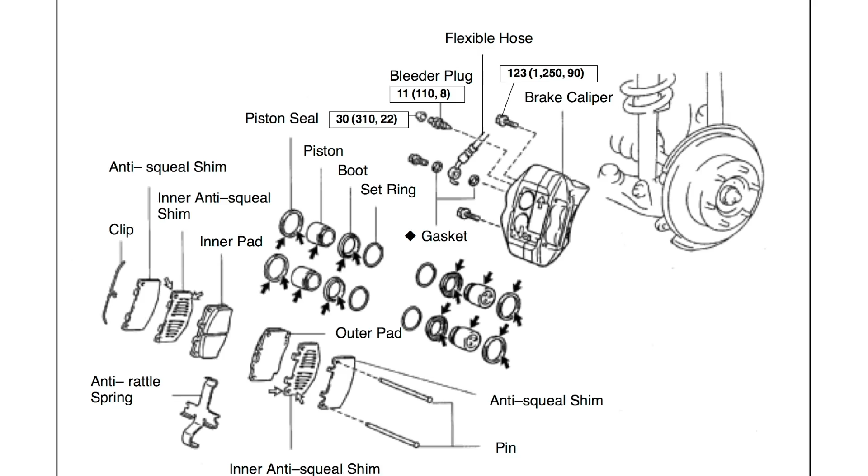So today we're overhauling a pair of knuckles from a late 90s Tacoma equipped with manual locking hubs. This allows you to disconnect the CV axle from the hub, and these came on some of the base model Tacomas that did not have the ADD automatic differential disconnect system. So we have these knuckles, and our goal today is to take the hubs out, take the bearings apart, press in new bearings, put in new seals, and put it all together so it'll be ready to install on a truck.

So we have to start by taking the hubs off, and I have these bolts loosened already, but there's 6 bolts on the dial face. They're very small. They're a 10 millimeter socket. Okay. 6 millimeter shank. And all the old 4Runners, they have that 7. That goes on the hubs only. Oh. Yeah. All right, good to know. Yep. Dial face comes off. You can see this is the mechanism that slides in and connects the inner hub gear to the hub body, and the CV shaft actually slips through here and connects into this inner hub gear.

All right. So take off these acorn nuts from a first gen, I decided to use them because they look kind of cool. Oh, that's where those came from. Yeah, otherwise they're just regular nuts. And then they have a washer. A washer. And a cone washer. The cone washer helps center it and makes it a stronger bond. But the whole thing should slide off. Okay. We got all our fasteners, and there we go.

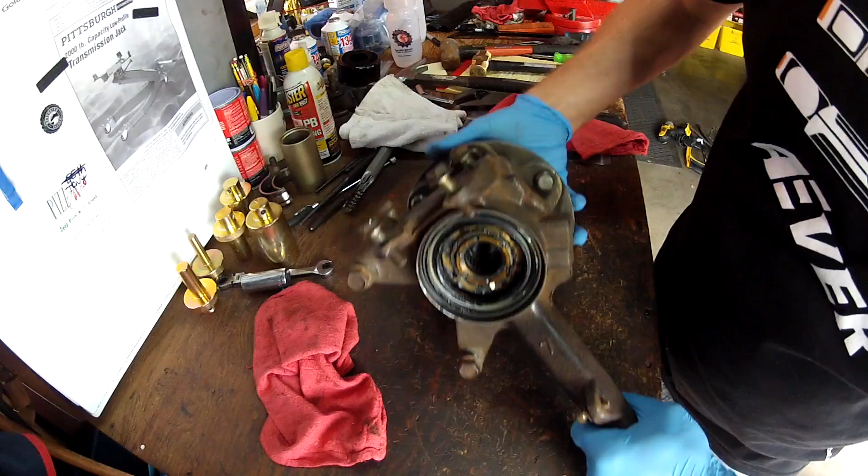All right. So you can see in here, I'm just going to spin it so you can see. There we go. So that's the hub. The hub is held onto the bearing, and it preloads the bearing with this nut. The first thing we need to do is remove this seal. This is the seal that interfaces with the CV axle, and then we're going to take the nut off.

So to start with the seal, we're going to use your puller. We're going to pull out the seal right here, and we're using this slide hammer puller. In order to get both arms in, we were able to get one arm into this bracket first, and then we had to keep this one loose and hook it in there because we couldn't hook them in both at the same time.

Got one arm in, hooked it in, then bolted it into this puller. If you don't have this type of puller, just use whatever you got. Now with a buddy holding it, I'm going to slide hammer it up and pull this seal out. Jordan's going to hold the knuckle right here, and I'm going to slide hammer this and pull it up. Watch the seal come out right here. Okay, 1, 2, 3, right there. Seal is out. Still trying to figure out why the guy packed so much grease in there.

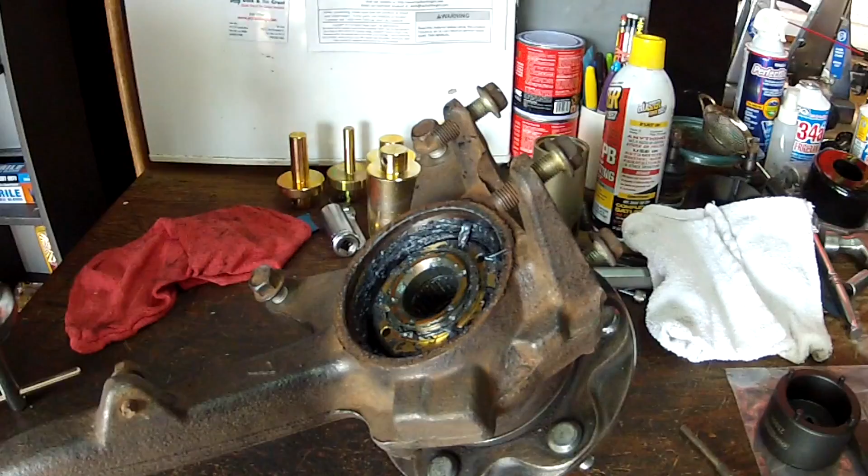If you're wondering about the comment I just made, we're wondering why the previous person packed this with so much grease, because really the grease isn't doing anything. It's running on a bearing. So what this guy packed it full of grease for, we have no clue. There needs to be some grease on the inside here, on the side where the shaft goes. But here, I mean, this is like he was packing it like there were ball bearings there. I don't know.

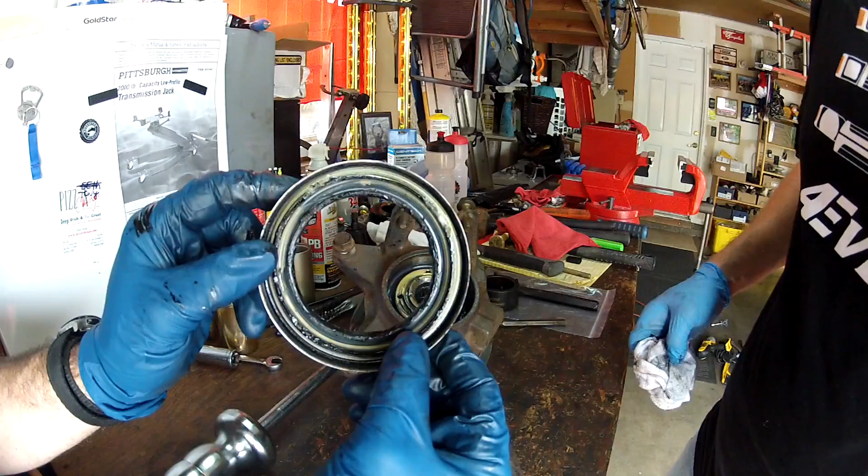So this outer seal went in like this, and we just pulled it out with the puller. You could use whatever puller floats your boat, but these slide hammer pullers work pretty nice.

The next step is we need to remove this ring nut. This screws onto the back of the hub and holds it into the bearing. We have this special spanner tool that fits in. Since it's about 200 foot-pounds of torque, we're actually going to bolt the knuckle into a spare tire and then do what we need to do.

This set nut, you basically set it into this indentation so it won't back off. We noticed that trying to pry that thing back out, we'd just mangle it a little bit. So when this thing spins up, it's really not going to get in the way of much. We found we could remove it without having to bend that out at this time. What we do before we reassemble it is take a punch and bend that out, get rid of that nub when we insert it. But to take it off, it's not a big deal, so we just leave it and take it off as is.

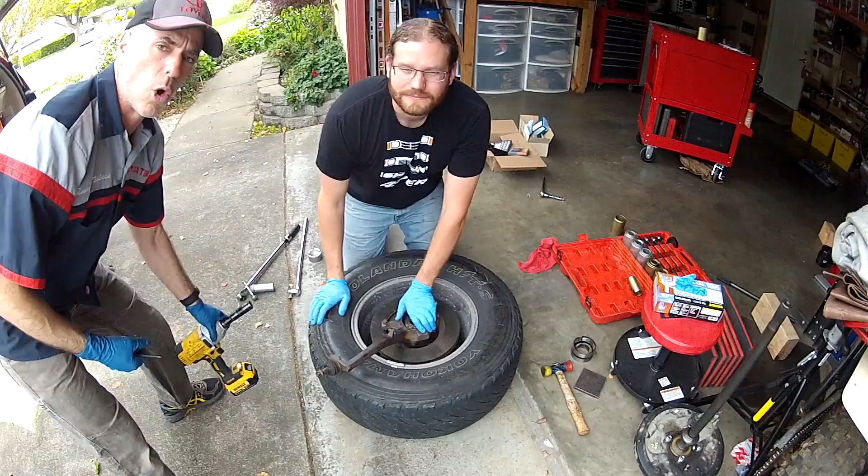So this is what we got going on: a spare tire, an old rotor, and the knuckle we're working on. What we're going to do is put a couple lug nuts and cinch this whole assembly with the rotor and the knuckle onto the wheel, and the wheel is then going to give us the ability to hold it firm while we break this loose, because it's held at 205 foot-pounds. So we need a lot of leverage to hold this in place. Right now Jordan is holding the assembly, he's going to tilt it up, and I'm going to get a couple lug nuts started.

Two seems to be enough. Just do them opposing, and then cinch it up with your gun or your lug nut wrench.

Okay, so here's the tool for taking off this set nut. It's a little bit of a friction fit, so we're going to tap it into place, tap it flush. Good. Take our breaker bar. Now I'm going to hold the wheel firm while he gives it some force.

What I was doing with my hand is holding it, because the tool has actually walked up on them already. This thing with the 4 pins wants to try to rock out of the holes, so I was holding pressure so it would be less likely to do that. See how it rocked out? So putting a little downward pressure - this is even more important when you're tightening it up at the end of the job. You want to push downward pressure so it doesn't walk out on you.

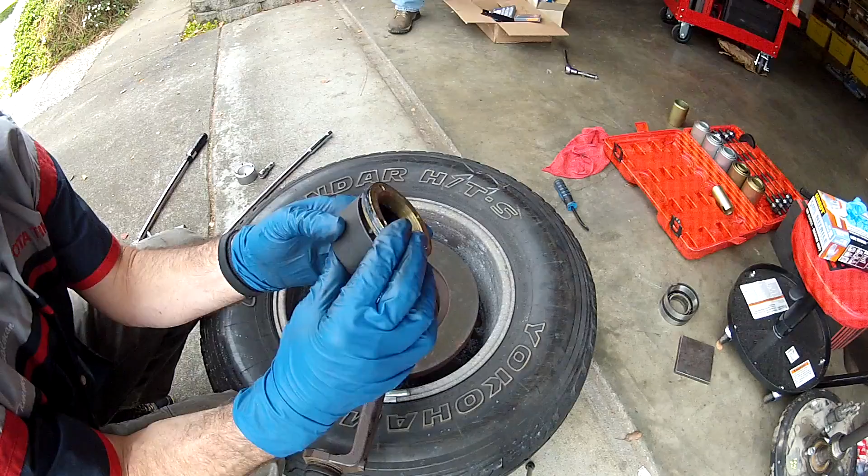Underneath the nut, there's a washer, and he's just going to use a magnet to pick it up. It's stuck in the grease. Okay, and that's the washer - big thick spacer or washer, whatever you want to call it.

We're just going to take the knuckle back off of the spare tire.

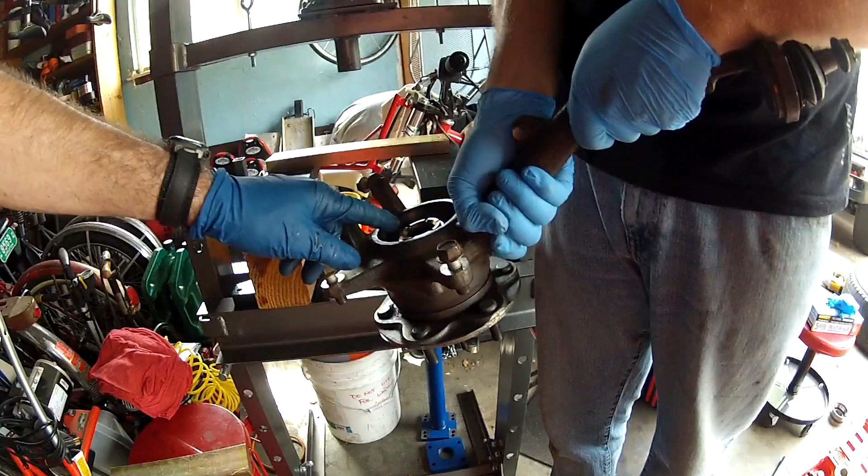We're going to drive this hub out from the knuckle here. What we need to do is gain some height to give room for this knuckle to go down.

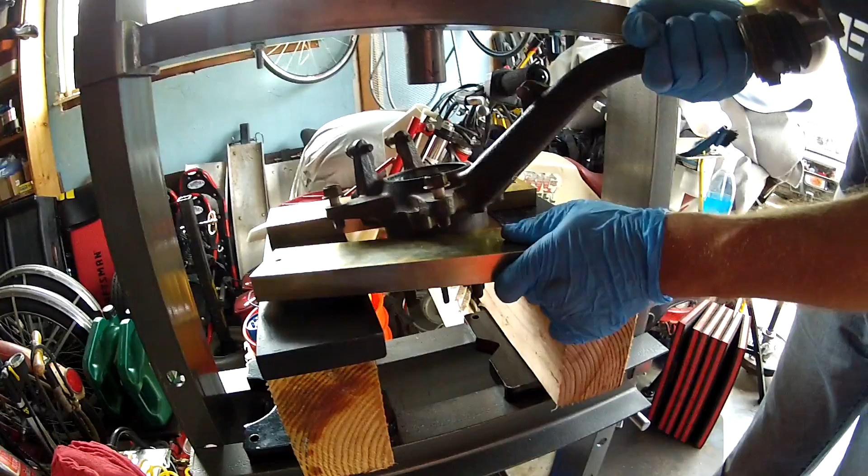What we came up with is the Harbor Freight press plates, plus a regular 4x6 section of wood cut into two 12-inch sections from Home Depot, about 15 bucks. That's sandwiched together. I also bought a couple more plates from a local fab shop, 1 inch thick by 4 inches by 12 inches long, to help disperse the load. Then we're capturing the hub with two other press plates that take the whole load, getting right underneath the nubs of the knuckle.

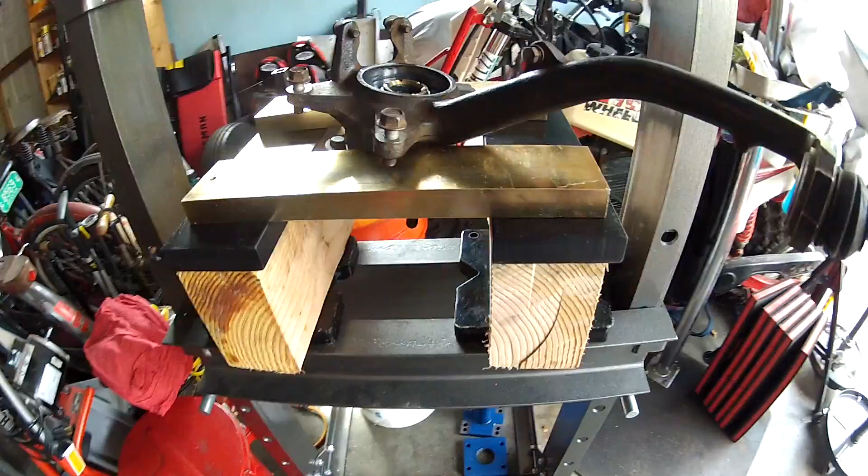On the back side, same thing, we're capturing a meaty part of the knuckle - this is the boss where the backing plate bolts on. So that's our setup: wood sandwiched between two plates, a Harbor Freight plate, one from the fab shop (4 inches wide, 12 inches long, 1 inch thick), and another bar that's 1 inch thick - I can't remember the width, but it doesn't matter, it works.

There's a brass bushing here, and the driver we're using is trying to sit on the steel part and not the brass. This piece goes around it perfectly, so that's what we're going to drive with.

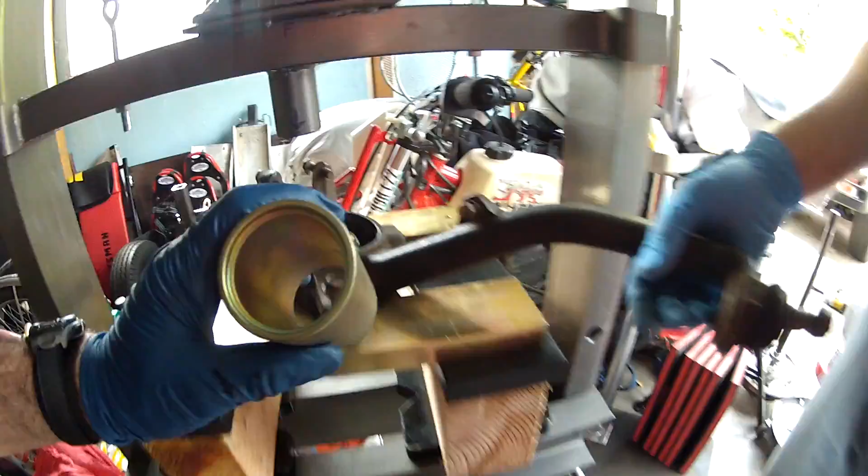If you don't have a press sleeve kit, you might find some type of pipe, like a piece of gas pipe, that would work. We have this press sleeve kit with all different size sleeves - it's a little pricey, I got it on eBay for 130 bucks, but it's nice because it has a ton of sizes for a lot of applications.

We found one that fits the outer diameter - it goes right over the brass but doesn't hit it. It hits the next part of the sleeve right there.

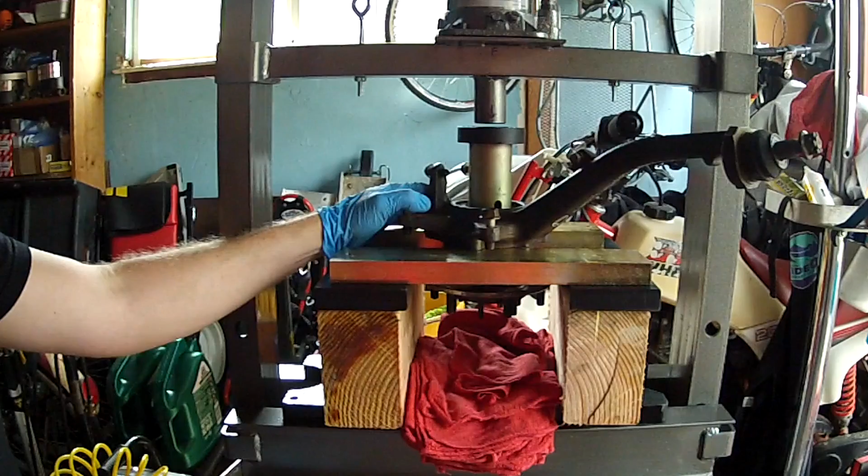This is just a regular Harbor Freight press that you can get for, depending on sales, anywhere from 170 bucks to a couple hundred. Works pretty good, it's a 20-ton press.

Our goal here is to press the hub out of the bearing and leave the bearing in the spindle, so let's see what happens. What we noticed the first time is the bearing came apart in pieces - this might happen to you too, and we'll show you on the other one. If this one works the way we hope, we'll also show you the disaster of the other one and how we got it out the rest of the way.

I'm applying pressure. It's coming, okay it gave. This is what happened on the first one - it gave a little, then got harder. Maybe this one's going better, we'll see, I hope so.

It's going pretty smooth, Jordan. Don't jinx it. You jinxed it, Tim.

It's loading up again. I think the bearing's coming with it. No, keep going. Maybe we got lucky on this one. We did. Okay, there. There it is, it's out. And there is our hub - the hub came out clean.

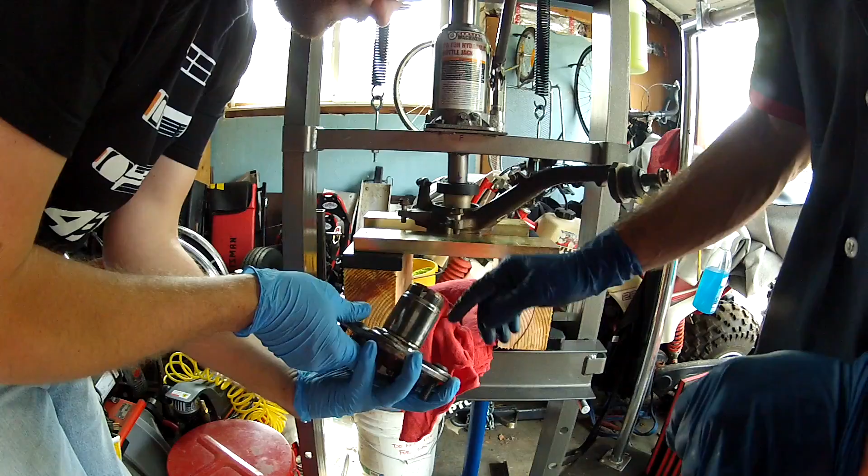On the last one we had to cut off part of the bearing, so this one being clean is awesome. We'll show you how we fixed that other one that got stuck.

The next thing we need to do is pull off this oil seal. This is a kind of dust seal between the knuckle and the hub when it's in place, and there's a circlip underneath that we'll take off next. So this is the seal right here, this outer thing.

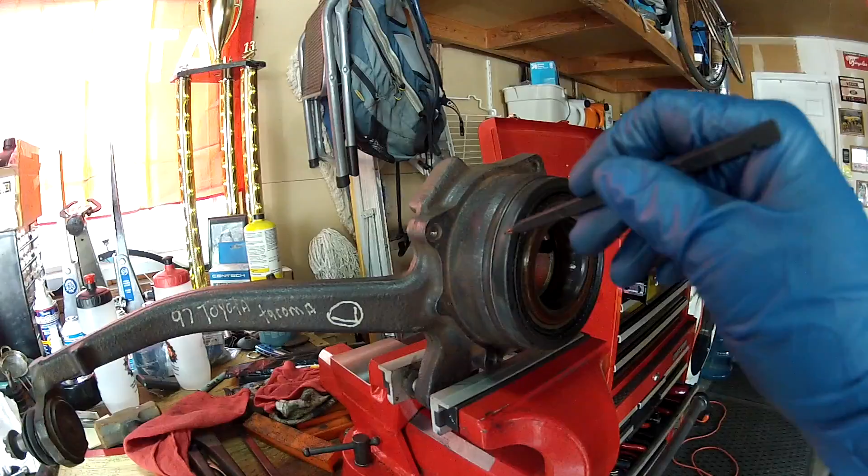We're going to get a 3-jaw puller and slide hammer it off. Here's the setup - we've got the 3 jaws grabbing right behind the edge of it, and there's another one over here. Then he's just going to slide hammer it off. Okay, go for it, Jordan. There it is, it's off - easy as pie.

What we noticed is the bearing came out a little bit and was pushing pressure on this C-clip. So we took a hammer and pounded this thing back away from the clip. Now Jordan's technique is grabbing on those lips and pushing it back in - he'll get it.

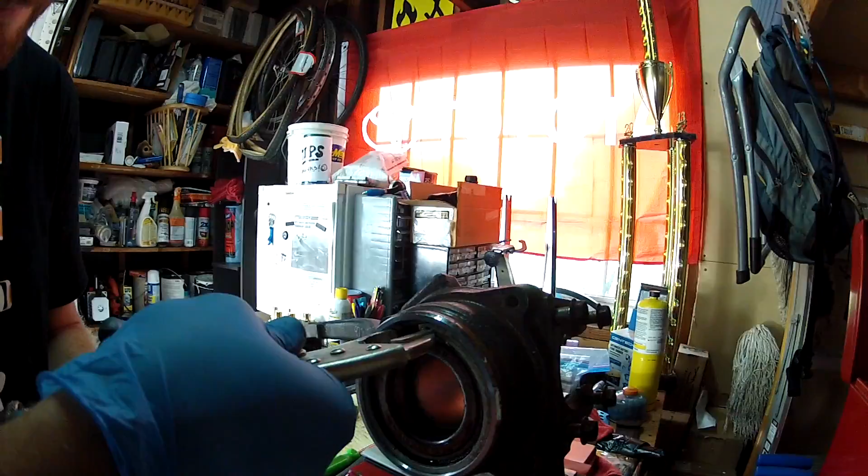We got it out a little bit. Now if we have a small screwdriver, we can pry it. Got it out a little bit. He's going to just try to pry it out now. There we go, he's prying around the edge with the screwdriver.

Yeah, you can work it out right there now, just with your hands probably. The bearing's probably still up against it just a little bit.

So yeah, the bearing was loading up that clip and we weren't able to get it out. But we're actually going to replace this clip. Yeah, you don't reuse it. Good to assume, like this one, you probably could, but we just assume that it's going to get kind of deformed.

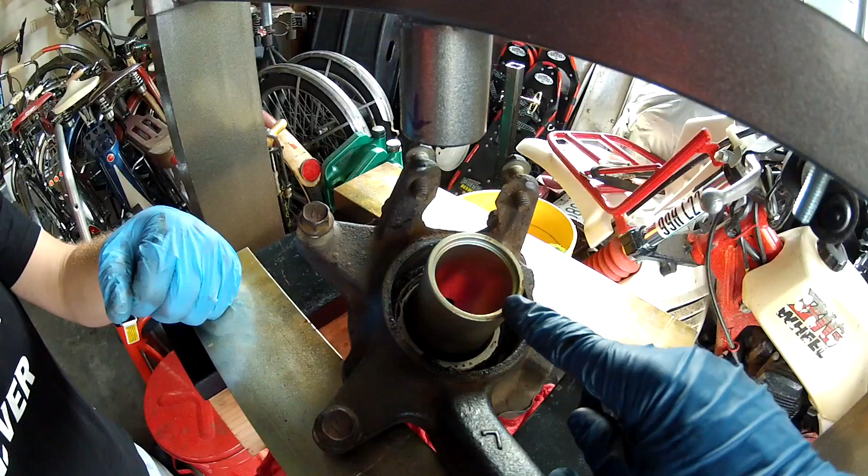So that press sleeve that got stuck in, it's still stuck in, but we're going to work around it. We're going to put a press sleeve of greater diameter over the outside, and then just press right over the top of it and it'll work. And then we'll get that sleeve out later once we got the bearing free.

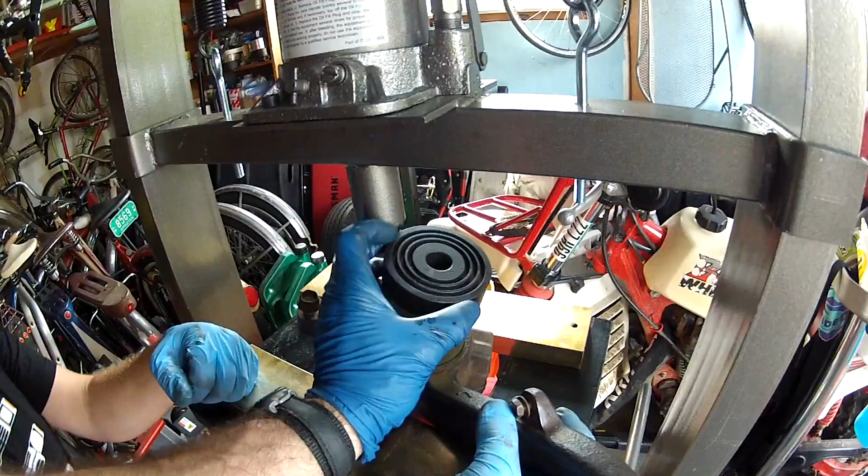This is the bigger sleeve that we're putting over the top here. It fits the diameter of the bearing pretty good. Now Jordan's going to rock it in place here, and I'm going to put this over the top. There you go, and that's our setup.

Just like how we pressed the hub out, now we're going to get the bearing out the same way by using the same setup with the press plates, the 4x6, and then the press sleeve to drive it out. All right, so here's the pressing happening here again.

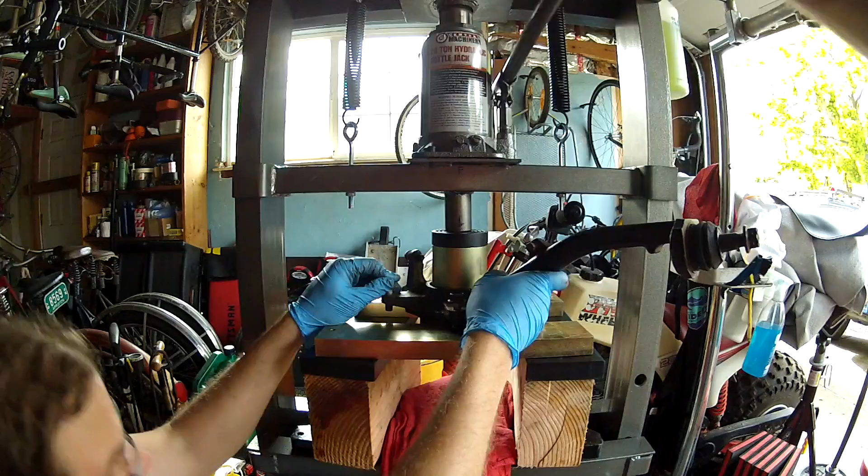Is it lined up good? Yep, keep going. Okay. That's going up pretty easy. Should be dropping out any time, I think, huh? There it is.

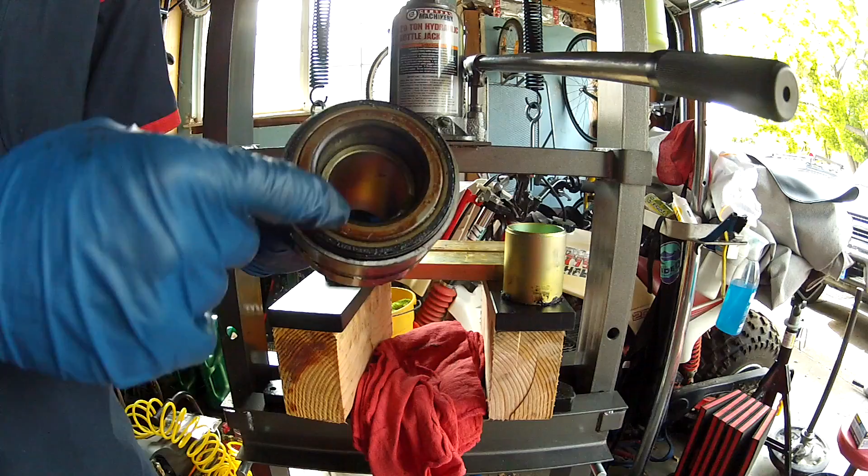Okay, so this is the bearing with one of my press sleeves stuck in it. We got to get this sucker out, but I think we're just going to drive it out with another press sleeve that's a little bit smaller than this inner diameter, and it'll hit the lip of the press sleeve and we'll drive it out. So I want my press sleeve back out of this bearing.

So I just got it captured again by a couple bars. Press sleeve that's a little bit smaller than that inner diameter, and I'm going to press the sleeve out the other side.

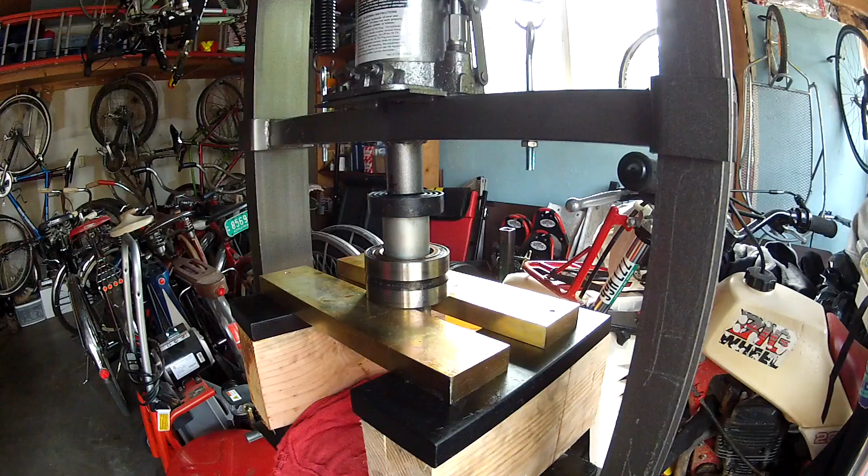There we go. Now I got my press sleeve back. You can see it wiped off the gold anodizing or whatever, so it's kind of changed it a little bit. But you can see how far it was driven in. And then now that is the actual bearing. It's a big burly bearing for these front wheel hubs.

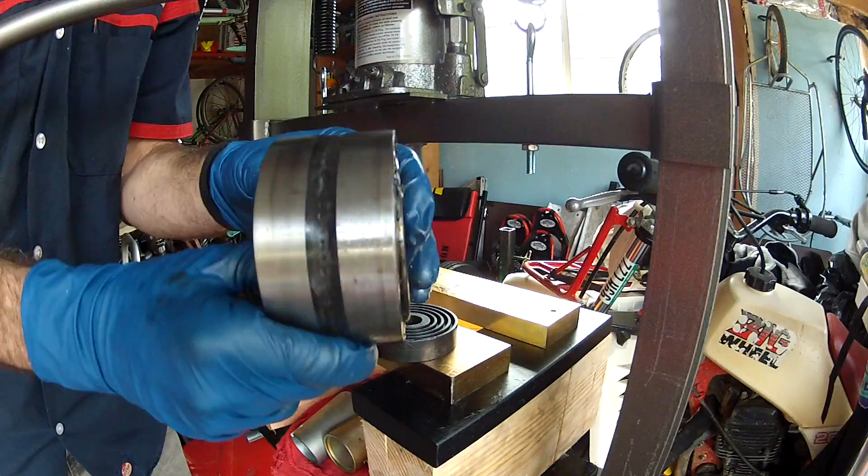Okay, so we have cleaned out the inside of the knuckle, and now here is the new bearing. It's a Koyo brand bearing. I didn't buy this from Toyota, I just bought it actually on Amazon, and it is actually the factory part. Now what we have read and seen is that you put the black side, the side with the rubber seal, down in, so that the metal shielded side is up where the circlip goes. So basically we're going to do this and press it in.

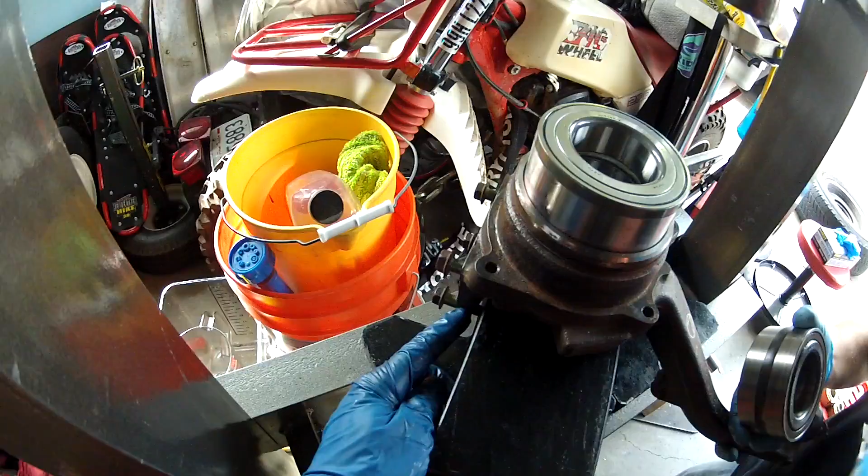So here's our setup to now press in the bearing. We have the Harbor Freight press plates as a base. Then we've got the 2 press plates and then 2 more on top of that just to give distance for the knuckle to hang off this backside. And we'll show you when we get the knuckle in place. So you can see the reason for the stacking of plates, it was to give space for that to hang off the backside. And so he's centering it underneath the press.

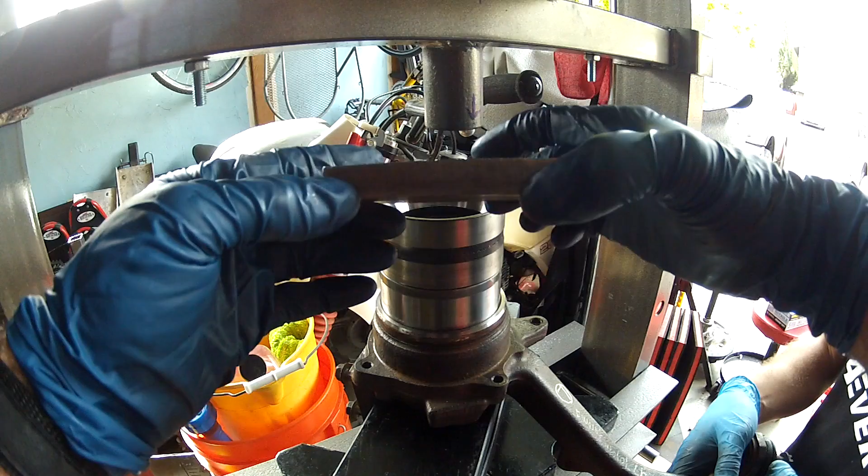Now what he's doing, we got this one, see the damage to this one? This was the first part of the bearing that we pressed out and it broke apart in pieces. So we noticed that using this as our pressing device, it matches up perfectly, right? So I just got this 4-inch plate that I bought online. You could actually buy pieces of plate online, 1/2 inch thick, to give a nice flat surface to press against.

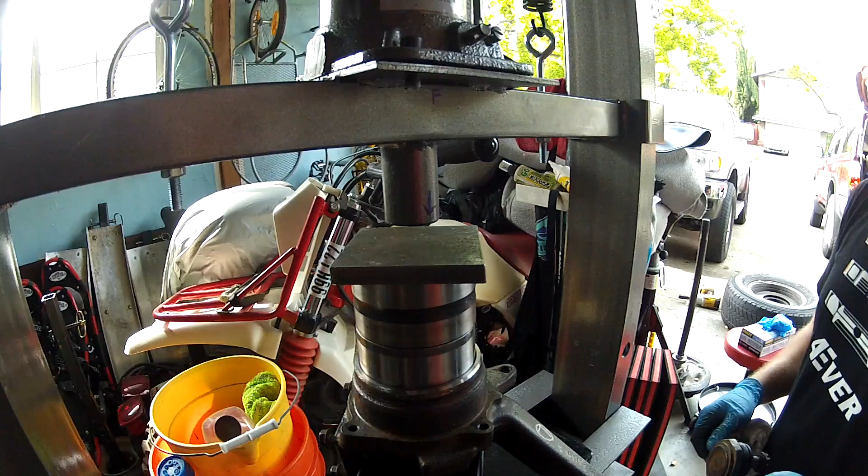And now we're going to center this thing underneath there and press away and press the bearing in. What I'm doing here is you could gain a little distance by screwing this out first so you don't have to press as far. It gains you more length from your 20-ton press. Okay, so now you can see we're closer to the material right off the bat. Now we're going to start pressing. What you might find is you might run out of room. You have to press so far, you have to reset. So we're trying not to have to reset.

Okay, now I'm bringing the press down. Okay, we got contact. Bearing's going to start going in. Bearing's driving in. Whoa! See, it did that last time. It hits like a lip. I think what happens is it goes in slightly sideways and then it corrects when it gets about halfway. That's more like it, yeah. If that's not going in totally square, then it just squares itself.

There's a relief down to below where the circlip clips. So you can take this bearing and press it all the way until this bearing stops without worrying about your driver bearing getting stuck. So like Jordan said, you can use this old bearing to press the new bearing all the way in, and you don't have to worry about this bearing getting stuck in the knuckle. We just did it on the other side, so you'll see it for yourself. So when you meet significant resistance, you know that you're done pressing, then you back off.

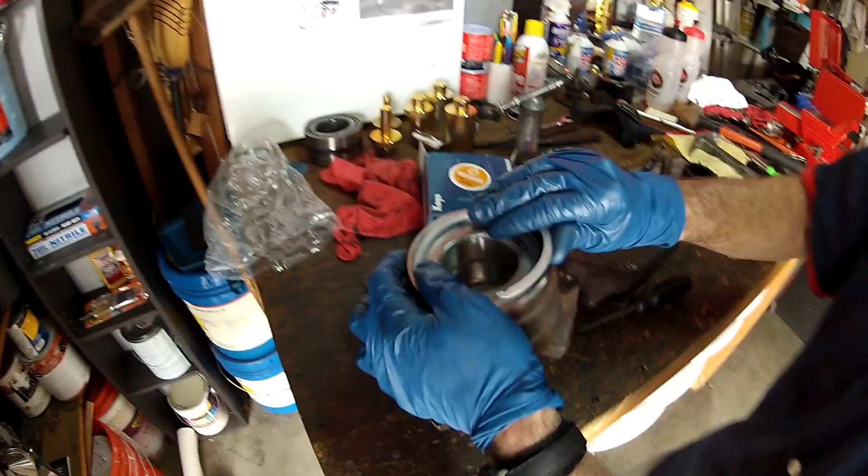Okay, we've installed the bearing, and you can see the circlip groove in there, so now what we're going to do is install the circlip. I think Tim has a special method, right? So you just work it in with your hand. Work it. You got to get it started on one edge, and then lever it in. There we go. Great. It's in. Okay, so now we need to put the seal on here and install the backing plate.

So Jordan's just putting a little bit of grease on the outer diameter of where the seal is going to be sealing up on this, so it just slides over. He's going to square it up with his hands as best as possible, and then he's going to use a brass drift with a hammer to knock it in place. Try to get it on as square as you can. Yeah. Now I could see right now that this side is high, so whatever side is high, there you go. Now it's going in level. See how he's working his way around, looking for whichever side's high, and hitting that. That looks like a good hit right there.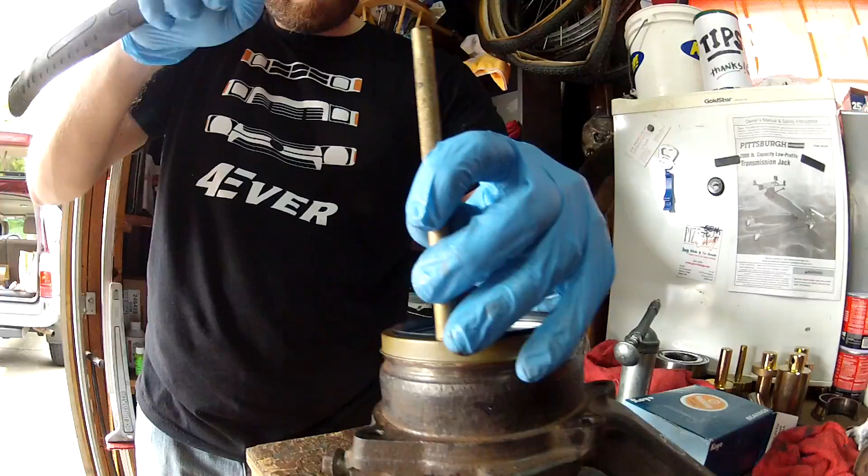And this seal is not so critical. It's really just a dust seal. So if we're a little bit mean to it, it's not the end of the world. You just want to sink it in all the way. Yeah. Okay. And now we're going to apply grease to the inner lip of it. And I'll spread it around with Tim's handy dandy grease squirter. Lubrication, fancy grease squirter. Great.

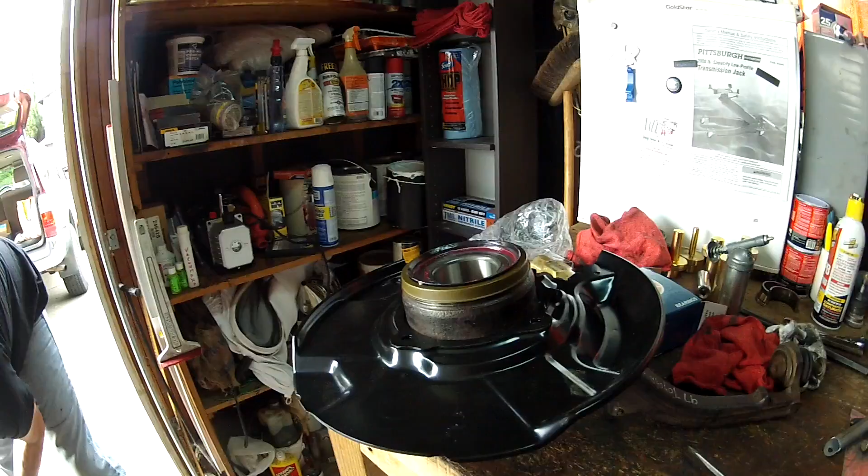Okay. Now he's putting on a new brake dust shield, and these are marked left and right. You'd have a hard time screwing it up. And this dished side faces up to give room for the rotor. So what are those, 10 millimeter nuts, or bolts? 12 millimeter heads. 12 millimeter bolt. Yeah, so these parts are all being replaced in this case because the backing plates and nuts had a little bit of rust damage. You want to be sure that you put this on before you press the hub back in. Yeah. You'd be very unhappy.

Yeah, you'd have to. It's time for a quick intermission to share an important message with you before you watch us press the hub into the bearing. The way we set it up is we put the knuckle directly on top of the press plate. Then we took a press sleeve, like so, with this adapter that comes with the kit I bought. We put this on top of the hub with the wheel lug nut studs facing up, and we drove the hub down into the bearing, and everything worked fine.

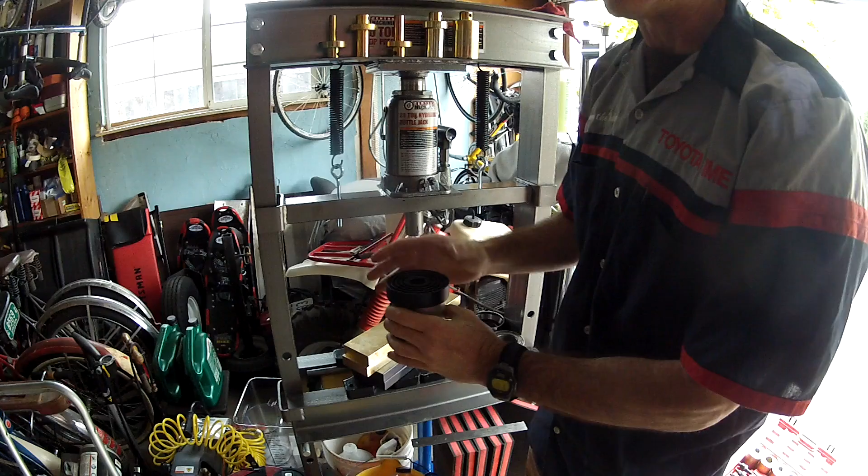After the fact, Jordan realized that we didn't do something correctly, and this is what we did incorrectly, and I wanted to share it with you. We should have been supporting the bearing on the underside while we're driving all this force with the hub into the bearing. So here's one of the bearings that we pulled out.

What I'm talking about is supporting this inner sleeve. So you grab a press sleeve that will fit good with it, or maybe it's some type of piece of pipe. This width is right about 2 3/4 inches. So this press sleeve, I have all these multiple press sleeves. This one fits pretty good.

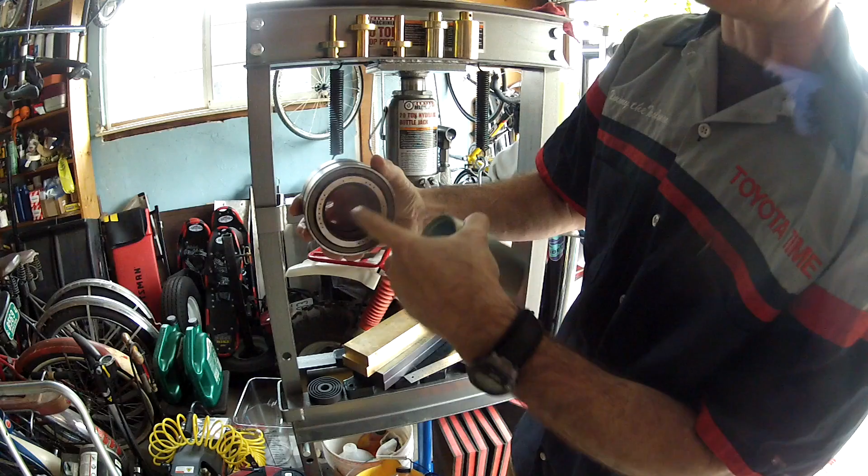You want something that will fit this diameter, but also allow the hub spindle to go through. So it has to be bigger than this inner diameter, but not so big that it goes over the sides and puts pressure on this part of the bearing. So in the next clips where you're watching us do the pressing of the hub into the bearing, just pretend that we had something supporting the bearing on the underside while we're pressing the hub through.

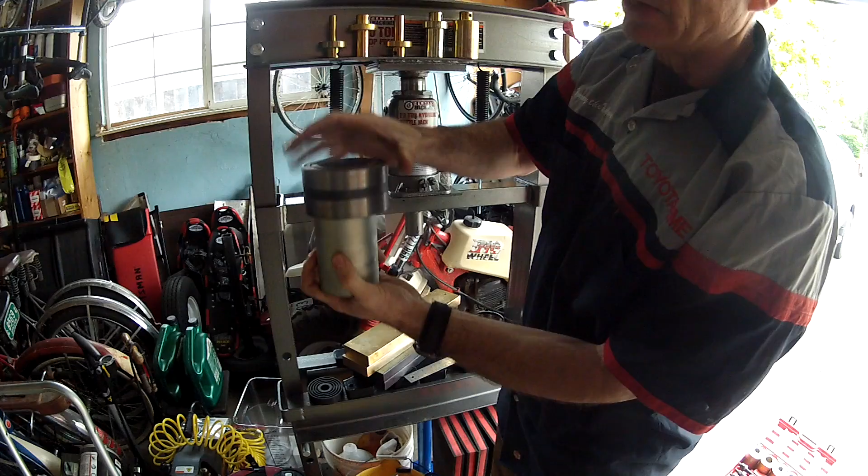So this would be inside the knuckle, and this would be underneath supporting it while we're driving that hub through. The reason why this is important is because the bearing really isn't designed to handle that kind of lateral load going in from the side. Because this bearing has been on that spindle for so long, it gets kind of locked on there.

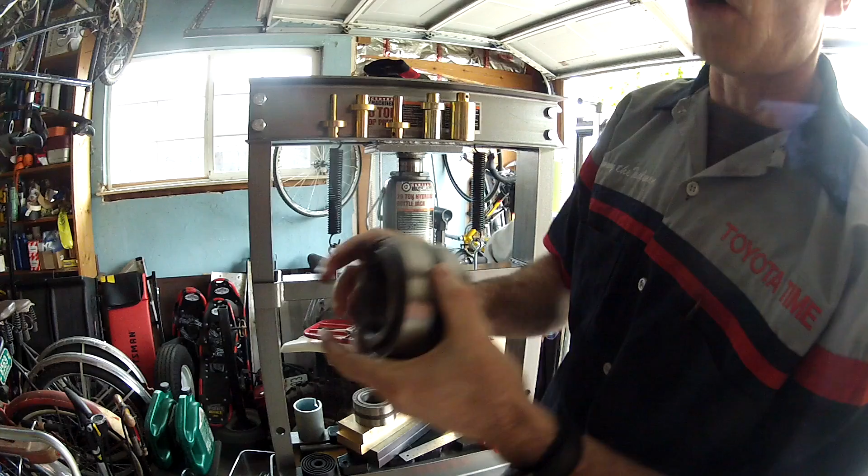And you can see this play right here. This play happened when we pressed out the bearing. So this bearing is now shot. You shouldn't have this play. This was the first bearing that got destroyed when we tried to press it out. Part of the bearing was still stuck on the shaft of the hub, and we had to cut it off. And you could see all this slop here too. We basically, like I said, destroyed the bearing.

So we're trying to avoid destroying the brand new bearing we're putting in, so that's why you want to support it on the back side while you're pressing it in. So far with my experience, I've done rear axle bearings, and then I've done this set of front wheel hub bearings for Jordan. What I've noticed, and it's probably common with most jobs, it takes a hell of a lot more force to press the shaft out of the bearing than it does when you're pressing it back in, because nothing's really locked on it when it's brand new.

But when it's been on there for a long time, it gets locked on there. It takes an incredible amount of force to break it free. And then once it starts breaking free, then it goes smooth. You're going to watch us press in the hub, and it goes really smooth. We lubricate the shaft, and it goes in fairly smooth. Did we screw up by not supporting the bearing on the underside?

And yes, we did. And so I wanted to drive that home, that when you do your press work, if you're following this video tutorial, to support the underside of the bearing while you're driving that hub through, so you don't risk damaging this expensive bearing. This OEM bearing is about 65 bucks. So long story short, did Jordan and I get lucky on the press work and that we didn't damage his bearing? I think we did.

There's no detectable play in his bearing. It's smooth. He's driven it a few hundred miles and everything seems fine. Did we potentially lessen the life of that bearing? Maybe. So don't screw up your new bearing by making the mistake that we did. Support it with some type of press sleeve or piece of pipe on the underside while you're driving the hub through. Okay, back to the video.

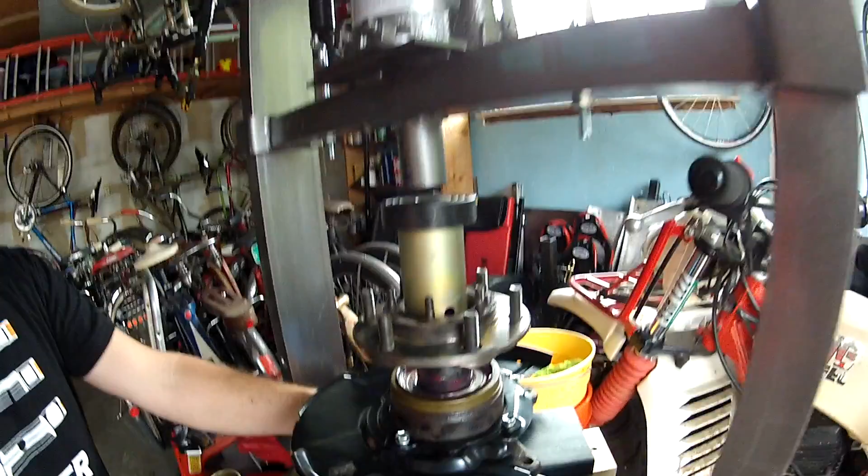Using a press sleeve with the adapter on top, we're going to drive the hub into the bearing and seat it all the way to where it stops, where we get resistance. Yep. Okay, it's firmed up and it's going to start pressing down. And you can see that we actually put some grease in there as well to help it slide in. Lubrication, people. It helps. Great.

Done. That's it. Jordan saw it and I felt the resistance as soon as he said it, so we knew we were done. Get that out of the way. And he's going to pick up the whole knuckle assembly. So now, here we go. We got the hub in.

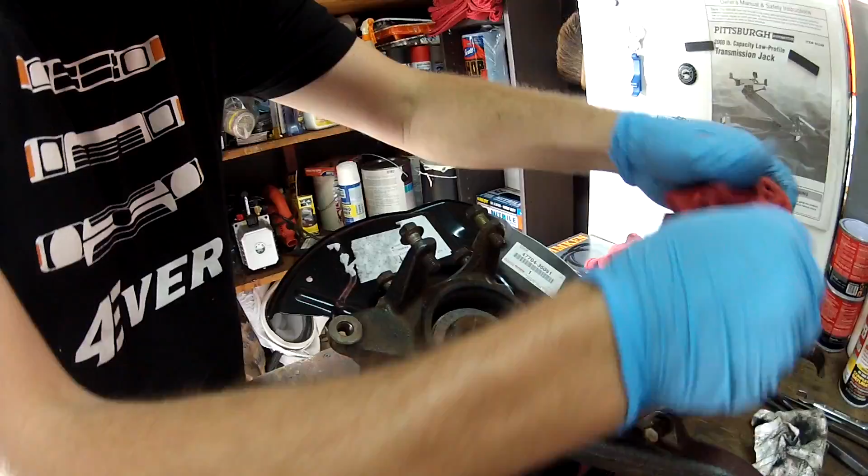Here's the spacer. And so just for good measure, I'm going to just spread a little bit of grease on the spacer. Lubrication, lubrication. Okay, drop that over the top. Oh, and take the ding out of our lock nut. So what he's talking about, that ding that I talked about earlier, it's that little indentation that helps set it and keep it in place. So he's going to take that out with a punch.

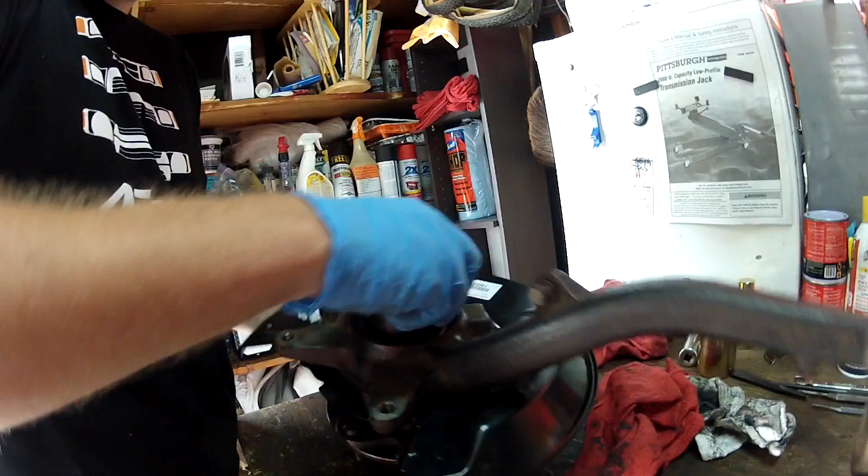Good. Look good? Okay, so he just bent that back to where it looks more like a circle than an indentation. So I'm going to put a little bit of grease on the threads, surface here, so that it has less friction while it's tightening everything up. And this is actually going to be setting the preload of our bearing. So now we'll take our tool. Is that starting to thread on good? Yeah. Okay. He's screwing it in just as tight as he can with his hand. That's pretty much it.

Okay, like before, we're going to use the spare tire and the rotor to hold this thing tight to where we can torque it to 205 foot-pounds. A wheel, indeed. So what we've noticed is that you really have to set this tool into the set ring. Make sure it's really square in there before you start cranking on it. Now again, what I'm going to do for Jordan, I'm going to hold downward pressure because this tool wants to rock out. Not rock out to like Metallica, but to rock out of its purchase.

It's cracking me up. Getting a little hard on the hand. Okay, go. Oh, hold on, so it's rocking out. Downward pressure with two hands because I think it wants to rock up. You ready? Yep. There we go. That was it. That was 205 foot-pounds.

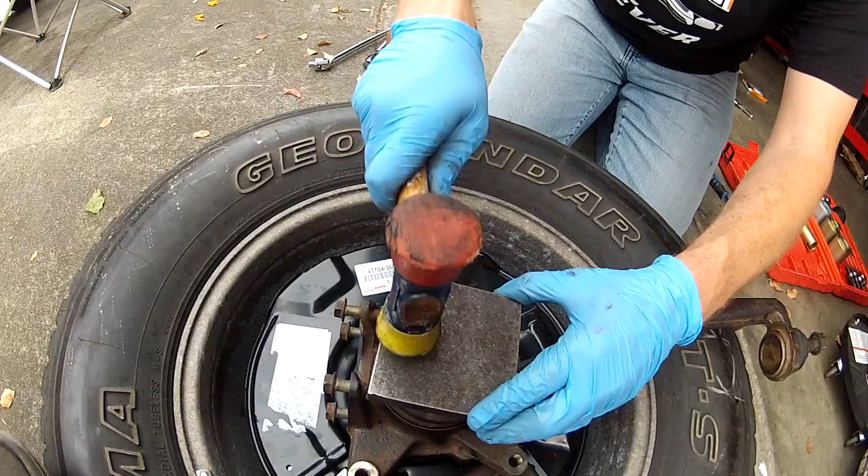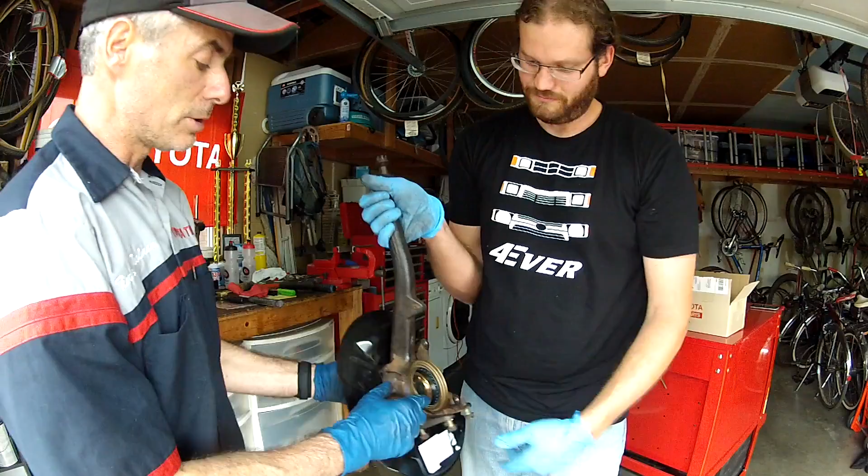Great. It's good. Now it's done. So here's the finished product. Nice and smooth. Ta-da. Nice new brake dust shield. Nice new seals. This is what was stuck on the hub spindle, this part of the bearing.

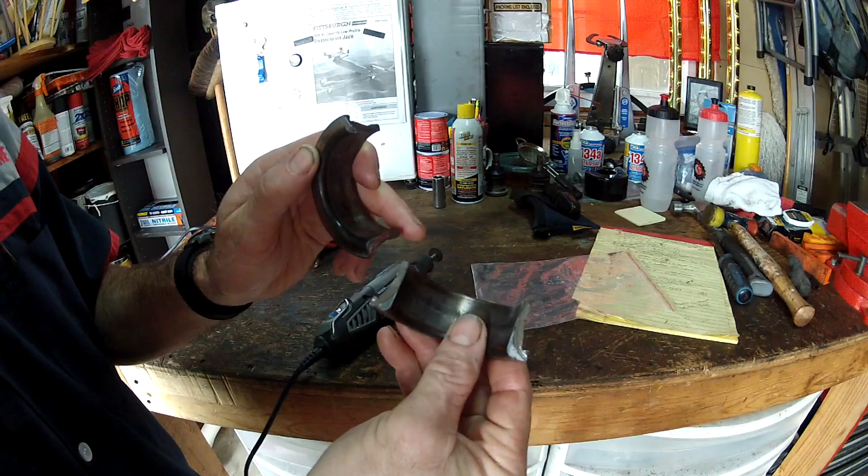So what Jordan did is he took a Dremel with a metal blade and he made cuts on either side. And then when he was pretty sure that he was almost all the way through, we took a big chisel, and we knocked it loose, and after quite a few strikes he was able to split it and it fell off. So he ended up scoring the hub, just barely nicked it. So he did a really good job. He had a really steady hand.

But if you're faced with this, where part of the bearing after you press the hub out is stuck onto the hub spindle, we couldn't get something underneath the lip to pull it off. So we tried a whole bunch of different pullers and nothing could really grab underneath it very well. So our last ditch effort was to cut it and it worked out pretty good. You just got to go slow, pull the blade out of the cut on a regular basis and take a look and just make sure you're not going all the way through. And then when you think you're pretty close, then stop and try to chisel it out.

You could see that the material is much thicker on the bottom. You could see right here. So as you're cutting this out, if you're doing the same thing, just know that you have to cut deeper down here below. So this was the first hub we did that we had to cut this part of the bearing off the spindle.

All right, so we're back on another day to complete this job. Great. Now that we have the new bearing and seals and associated hardware back in this Tacoma knuckle, we have to pull out his old knuckles, his old CV axles, and we have to replace them with this stuff. So these manual hubs require a different CV axle, so you can't reuse the CV axles that you had on your truck originally. These take a different axle. So when he bought these knuckles used, he also bought used CV axles that will match up to these.

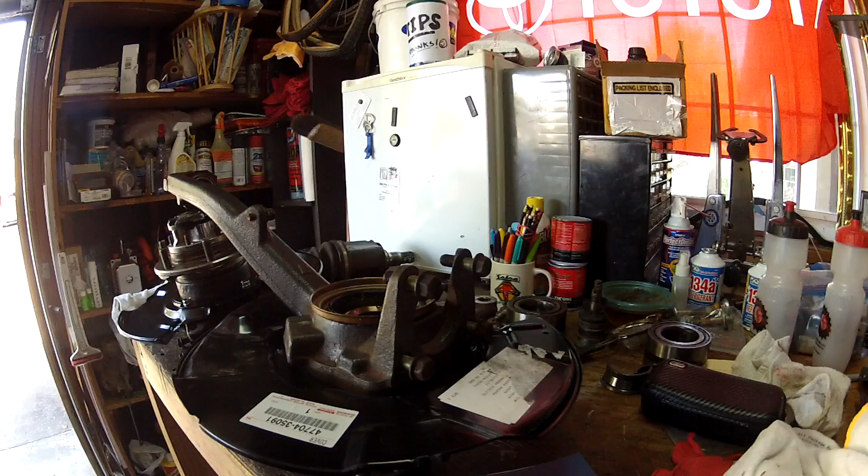Some other things to think about when you're gonna do this job is this could be an opportune time to put new lower ball joints if you haven't already replaced them yet, because they are a known failure point for our 3rd gen 4Runners. And then another one is to replace the upper ball joint. If the upper ball joint is worn out, needs replacing, this would be a good time to do it.

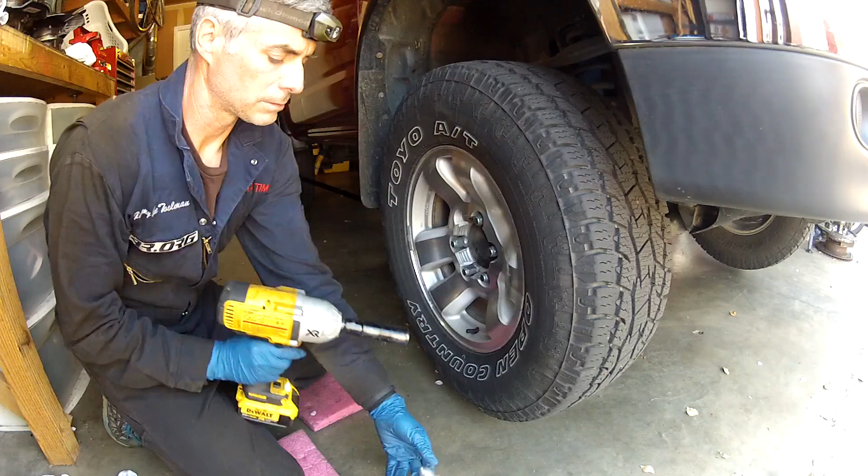If the joint is in good shape, but maybe just the boot is bad, what Jordan did on these upper ball joints that came with the Tacoma knuckles is he just bought a reboot kit, and the reboot kit came with new boots, a new wire, and the grease for it. So that might be a good way to go if your joint is still tight, but you just want to renew the boots and put new grease in. All right, we're going to take some wheels off. Okay, that's one side. The next side.

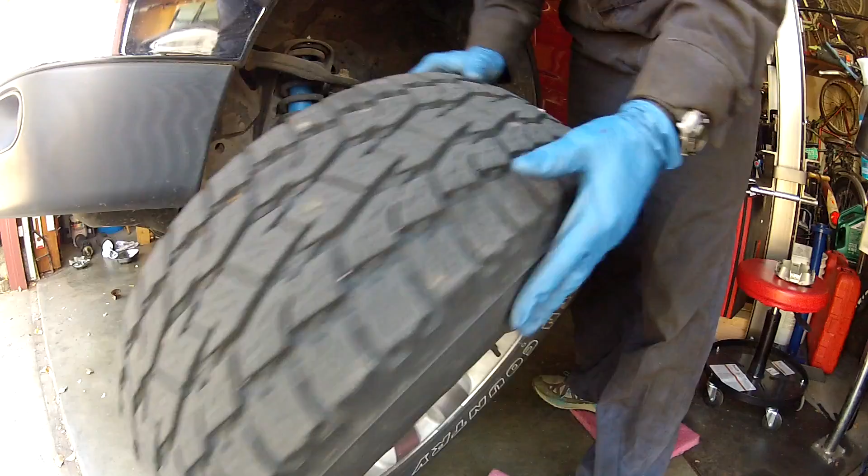He's going to break the two 17mm bolts that hold the caliper onto the knuckle. Here, I'll get you a regular ratchet. That's okay. Okay, there you get it. I'll get you a ratchet.

Oh, this guy. Yeah, we got to take that bracket off the knuckle first so we can then move the whole assembly up. Yeah, we got to remove that out of the way first. So Jordan's going to remove the brake line bracket off of the knuckle. He's got a 12mm and he's using a Milwaukee cordless. Like I said, you got to loosen it a little bit first. There you go. It's kind of nice. Yeah, it makes it quick.

All right, so we have our wire hanging. We'll show you where we got this hanging. Jordan's taken out the last bolt. Now he could slide it off. And then he's gonna use the baling wire to hook it, and then tie it up as high as he can. Get it out of the way. We just got it hooked on this with the bracket that holds this piece on. We got the baling wire run through there, through a bolt hole. And so now it's up and out of the way.

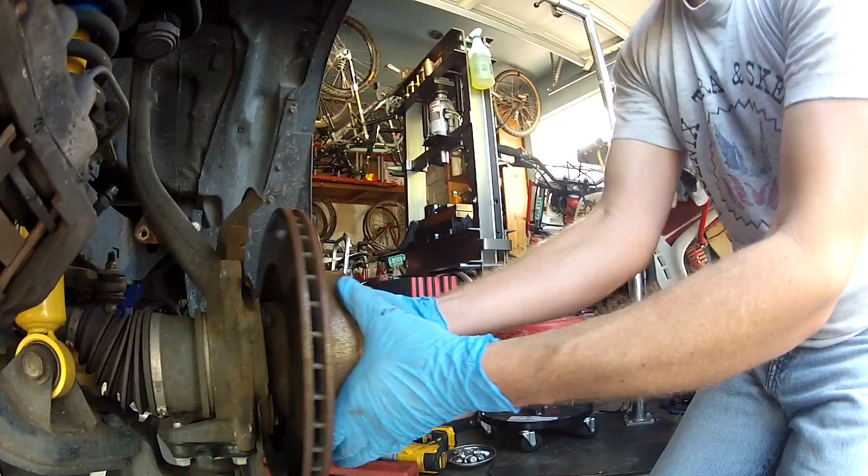And then now we could just pull the rotor off. If it's not easy to come off, pound it a little bit with the plastic hammer to break it free, because sometimes it could get rusted on here pretty good if you live in a rusty area or on the coast. And so pound it a couple times, maybe more than a couple times if it's really stuck on there, and then you'll be able to pull the rotor off.

So the next thing Jordan's going to do is he's going to remove the cotter pin for this outer tie rod. He's going to spin off the castle nut, and then we're going to break the ball joint free of the knuckle with a puller.

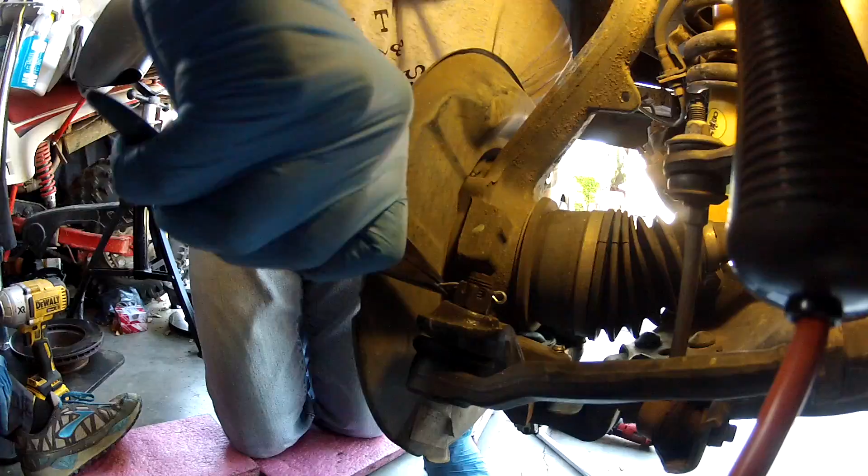So Jordan's going to use the impact gun. He's got a short extension with a short 19mm impact socket. He's going to zip it off. Okay, that's off. So Jordan's using a different style of puller. It's actually out of my kit, but I've never actually used it. And that's not capturing the boot, huh? No, it's just going around it.

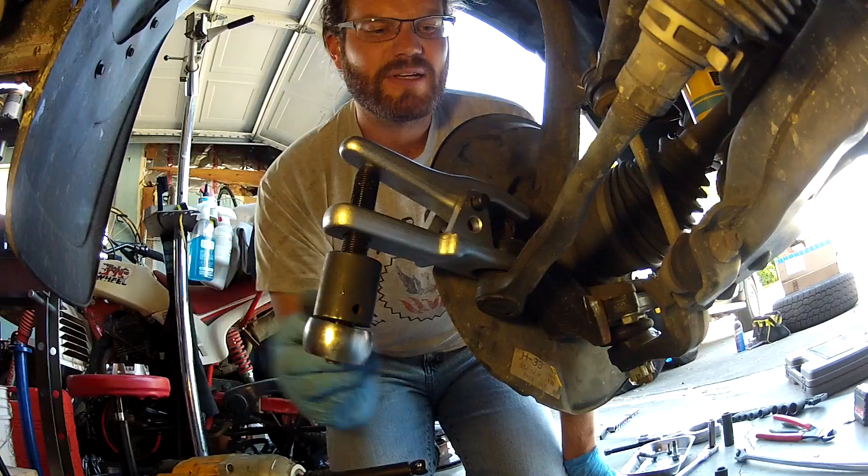What's nice is that the twisting is all here, and then it's just pushing. It has a lot of leverage, and so I was kind of impressed when I used it how seemingly low impact it was. All right. And it was low impact application, high impact result. Yeah. Okay, so the tie rod is free of the knuckle.

Now what we'll do is we'll loosen the four 14mm bolts that hold the lower ball joint to the knuckle. We're not going to take them off all the way, just loosen them, and then we'll get the castle nut loose and the ball joint broken free of the lower control arm. Jordan is now going to the gun.

There you go. He's got one loose. Yep. He's got the other one loose. Now turn it. There you go. Okay, he's got that one loose. All right. All four are loose. Next thing, he's going to grab needle nose pliers or some dikes, and he's going to remove the cotter pin from the lower ball joint castle nut. And then we're going to get that castle nut off and then use a puller to break it free.

I think that's a 24, Jordan. Okay. Check it, is it good? Yep. Okay, he's going to zip it off. Now leave it partially on, and then when we break it free, it's not going to go flying on us. So screw it on to where it's past the end of the stud, and then now let's get a puller on, then let's break it free.

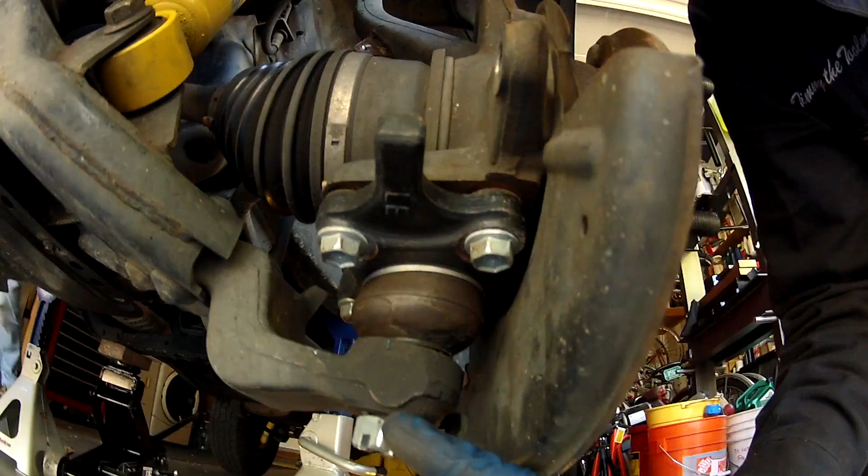Okay. Before you take the castle nut off all the way, let's get this axle dust cover off first, because keeping the ball joint connected gives us a better platform to pop this thing off. So don't take this off yet. So to get this dust cover free, I have this little knife-edged chisel, some type of small little skinny chisel.

You could probably do the same thing with a screwdriver that you grind down a little bit, but the key is to have the wedge facing out with the flat edge facing the knuckle, and you just pound your way around to get a little bit of movement out of this dust cover. Once you get a little bit of movement, then you switch over to a chisel that's going to move it a little bit further, and then you go to even a bigger chisel to where you can get this thing almost all the way out. And the last step usually is you take a pry bar and you pop it loose. So Jordan's going to start.

He's getting a little bit of movement out of that dust cover every hit. Now he's got a little bit of distance, about the max distance for that little chisel. Now he's going to work his way around to the next size chisel, getting a little bit of movement each time. All right, now he's going to graduate to the bigger chisel and get even more movement.

Pop it out away from you and see if you can get it off. Just hit it with your hand, like pop it. Oh, I see. Yeah. Just like that, and hit it on the opposite side. Yep, it's moving. Nearly there. There you go. Excellent. So you could see that we didn't damage this thing.

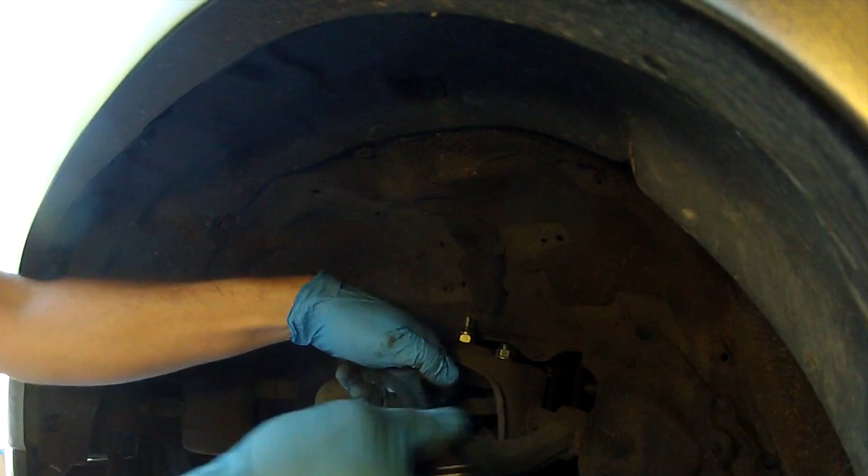Let's get that 2-jaw puller, the long one - yep, that one, right. He's going to get the tines of the 2-jaw puller underneath the lower control arm and bring the screw bar down onto the castle nut.

Maybe screw that castle nut down just a little bit more, make it flush. Now with this longer jaw puller, it makes it a little bit hard to get on that top nut, but he can do it. I have faith in him.

Jordan's using a new set of wrenches I got from Tekton - it's a ratcheting 6-point long box end wrench, works great for this. It flexes as a flex head. Whoa, there we go - boom goes the dynamite.

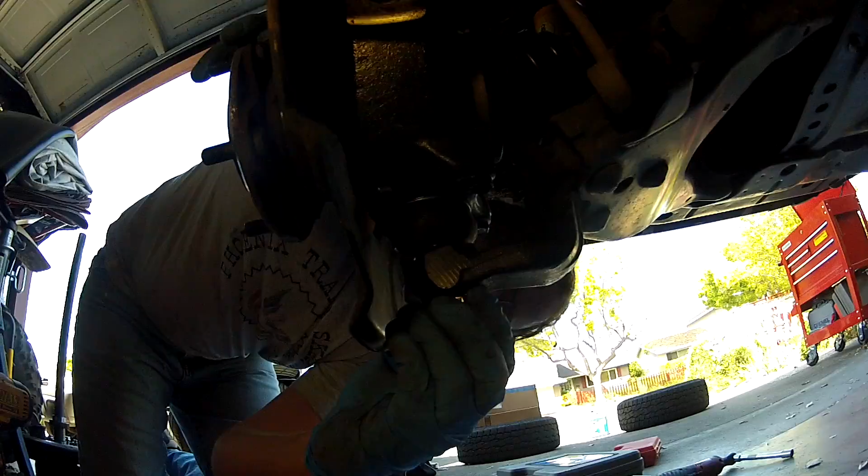Now Jordan's going to take the lower ball joint castle nut off all the way, pull it out of the lower control arm, and push it out with his hand. Anything else connected? No, I don't think so. So we're just going to take this off.

As long as it's broken free, then I think you can get it. But watch out, that thing's going to drop - hold on to it with one hand. As soon as that castle nut comes off, it's going to want to flop on you. There you go, now you got a good hold of it.

Now you can push it out of the CV axle. There you go - it's out. Good job, Jordan. Was that good, Coach? Absolutely.

One thing we did that we didn't show is we removed the front skid plate and the rear skid plate. We drained the differential so we wouldn't get a bunch of gear oil coming out when we removed the CV axles, and moving the rear skid plate out of the way helps us access the CV axles in the differential. We didn't bother showing it since we cover it in the 30,000 mile service video - check that out if you want to know how to drain the differential. We didn't want to waste time showing it again, so we assume you can handle that if you're doing this job.

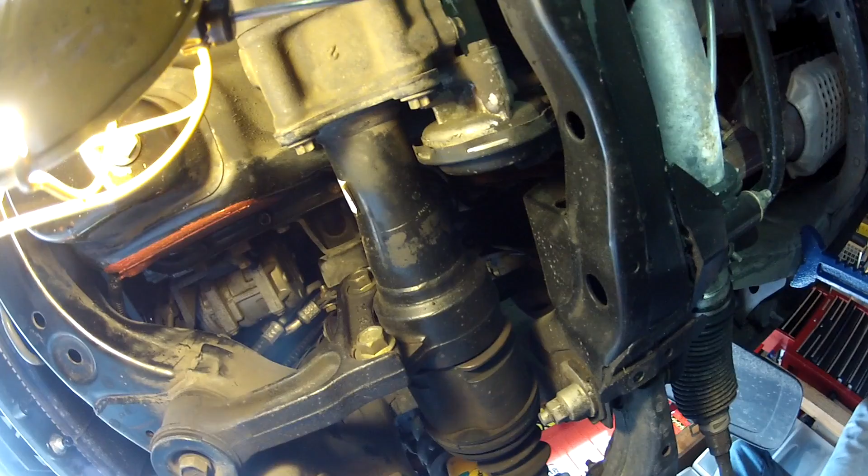The next thing we're going to do is pop the CV axle free of the differential. Jordan's going to use a pry bar to get in between the differential housing and the CV axle and pry outward to break it free from inside. There's a C-clip in there set into a groove, and Jordan's trying to free it from that groove.

Looks like you got it a little bit. Yeah, there you go. Good job. Good technique, Jordan. Great, let's see.

Now I'm going to get it on a broader surface like that if I can. If not, let me get... if you got it. Oh, hello, got a little bit of fluid. We thought we drained it enough, but obviously not. There must be a little reservoir in there, a low point. There's actually a bearing that sits in there and takes a little bath in there.

There we go, good technique. Okay, the CV axle is out. So this thing that I'm moving with my finger back and forth, that's the C-clip that fits into the differential and into a groove, and that's what you're trying to break free. Once you pop it free, you can pull the shaft out.

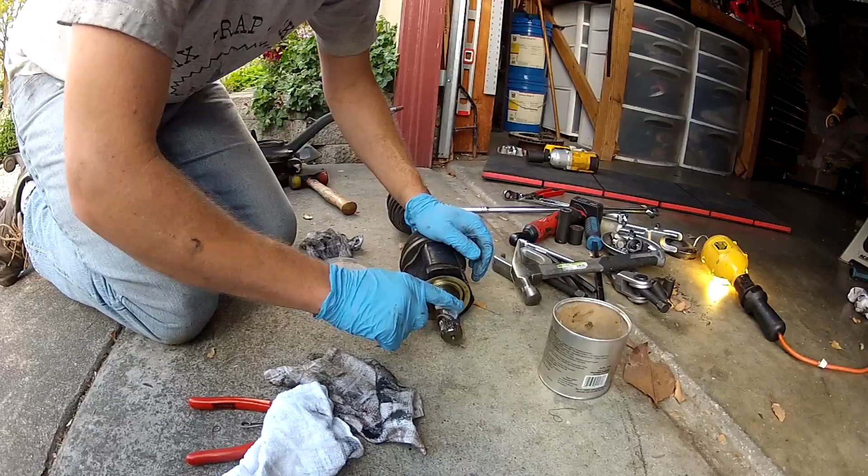So Jordan is just going to use some super lube to grease up the shaft of the Tacoma CV axle and get it ready to go inside the differential.

So he's put in an extra amount on that C-clip. I read in the factory service manual that they give a hint that if you have the C-clip opening facing down towards the ground, you'll have a better chance of being able to knock it in a little bit easier into the differential. Jordan's going to re-grease the inside seal on the differential, applying some grease on the lip of the seal at the end of the differential housing.

Okay, we ready? So now he's going to insert the shaft in. It's only going to go in just a tiny ways, but you can feel when the splines line up. Then when you get it lined up, you hold it there, then you grab your long pry bar with a hammer and you pop it in.

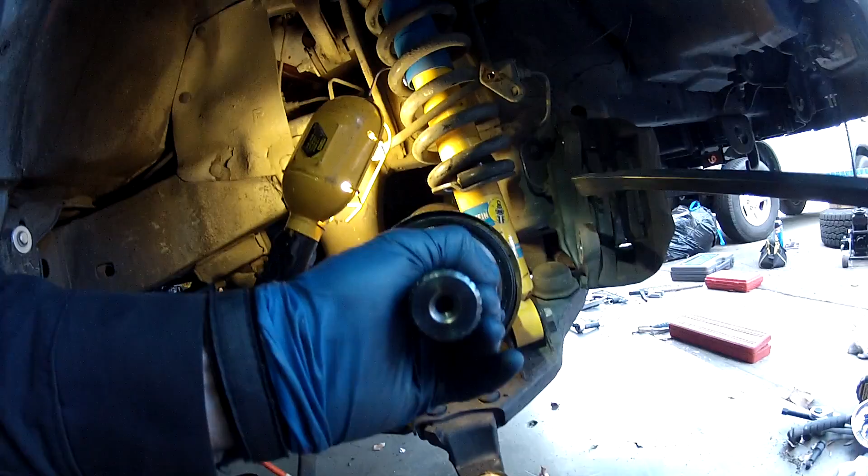So he's just working it around trying to get that spline lined up. Jordan's going underneath and trying to get it lined up easier here. Yeah, that's in, okay. Now the key is I'm going to hold this here for Jordan while he resets and gets up here. I'm holding the CV axle parallel to the ground, and he's going to get on one of the flanges and try to knock it in with the hammer.

Oh yeah, there you go, rotate it. Okay, rotate it again. Rotate it again. One more time. That's it, seated, okay, great.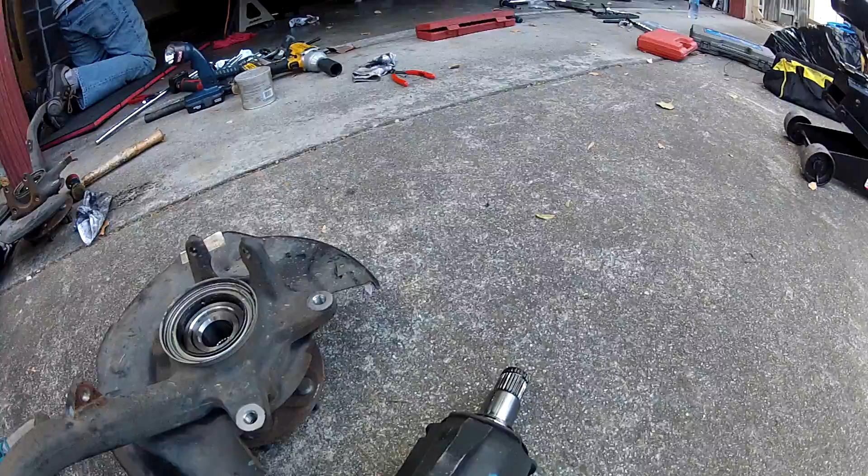So let me show you over here what he was hitting on, so you have a good idea. He was hitting right here, striking back here with a hammer, catching the lip. He was hitting it, getting a little movement, and I was rotating the whole assembly for him while he hit it again. The thing is you strike it on this lip and you drive the splines into the differential to where this C-clip gets into the right groove.

Now we're going to check to see if that's seated by pulling on it. Grab it with your hand and pull back and forth, and if it's not seated, it's going to pull out on you. But this sucker's seated, I'm pulling a lot of pressure here and it's not moving, so the axle with the C-clip is definitely in the right spot inside the differential.

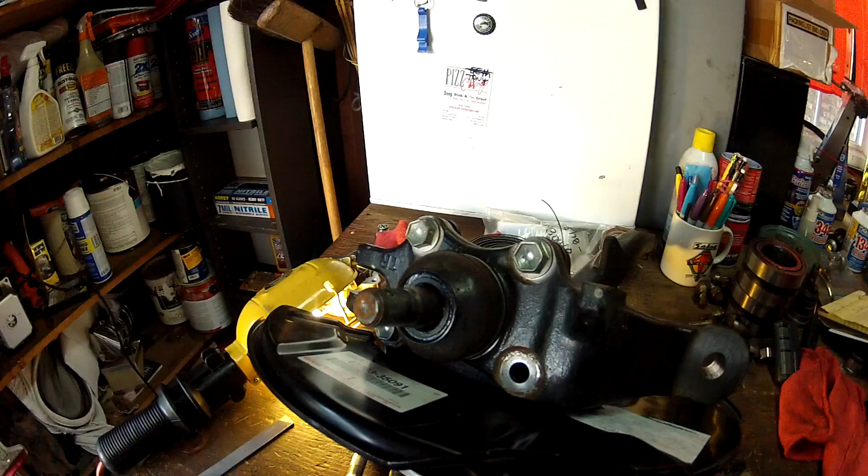Okay, so we got the old ball joint off the other knuckle and we're putting it on the new knuckle, using a little bit of blue 242 Loctite. Some people decide to use red, but I don't recommend that because it's going to make it really hard to get these bolts off ever again. Blue is all you need. So we're just going to snug these up, not torque them down all the way yet.

Okay, so getting ready for the knuckle to install, we're just putting some grease on this. Inside of the hub there's bushings and needle bearings, and they all need a little bit of grease to be happy. And this is also the dust seal, which we're going to grease up too.

Jordan is sliding the CV shaft outer shaft into the hub, then dropping the lower ball joint shaft into the lower control arm. He gets the nuts started a little bit, and now we're going to get the upper ball joint pulled down.

This is where it takes an extra set of hands, so I'm going to pull down and straighten that thing out a little bit. There we go. Now we're going to tighten up the castle nut of the upper ball joint first and torque that to spec.

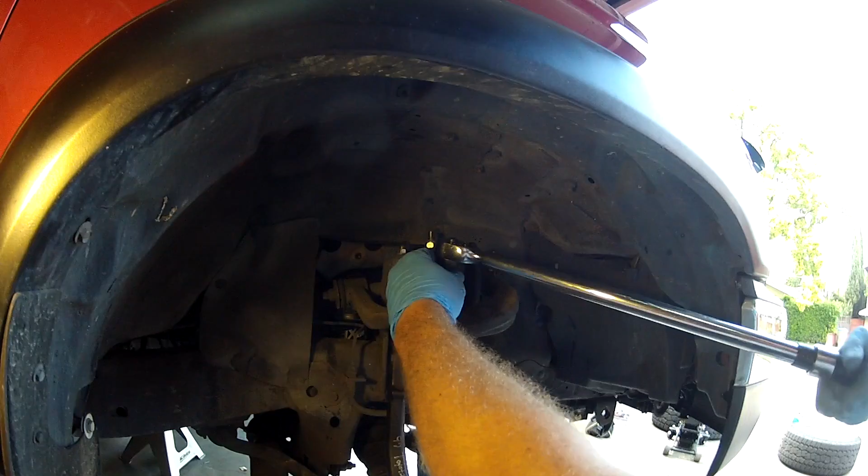Now he's going to grab the torque wrench and torque it to 80 foot-pounds. Now he's going to see if the holes line up to get a cotter pin in there. If it doesn't, he'll have to tighten it up a little more until the holes line up with the castle nut. So now he grabs a breaker bar with the socket to tighten it a bit more so the cotter pin holes line up.

Voila, there we go, the ends are bent over. Jordan's going to get the outer tie rod connected to the knuckle of the lower ball joint. The torque spec for this is 67 foot-pounds.

He cinched it down with the half-inch ratchet, now he's going to grab the torque wrench. To make tightening the outer tie rod easier, we lock the steering wheel so he can tighten it without the whole thing spinning on him. There you go, 67. Now he's got to see if the holes line up for the cotter pin. Looks like a little bit more.

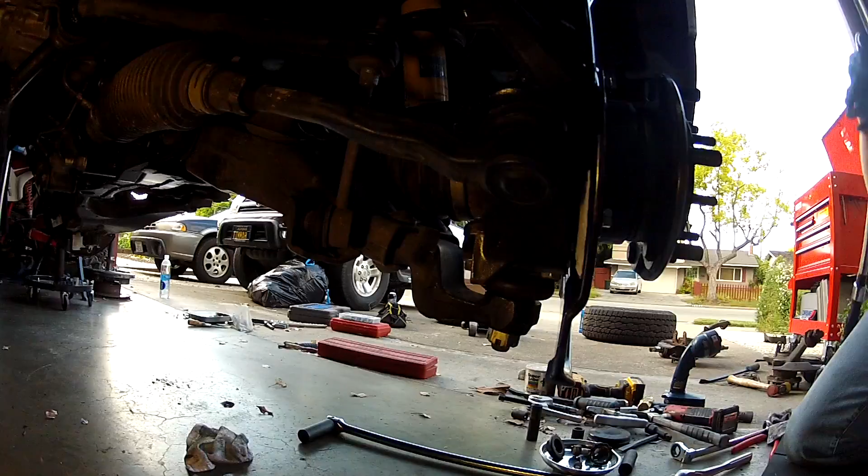Okay, fresh cotter pin is installed. Now he's tightening the lower castle nut with a 24mm socket, torquing the lower ball joint castle nut to 103 foot-pounds. There you go, 103 foot-pounds.

Now he's going to see if the cotter pin will fit through the castle nut. Like the other ones, the holes didn't line up, so he's got to tighten it a little more to get the hole to line up. Bend it over. Okay, now we need to torque these guys.

Now we're going to torque the 4 bolts that hold the ball joint to the knuckle to 59 foot-pounds. Jordan will probably be able to get 3 of them, and then we'll have to loosen the steering so he can get to the last one. So he can get to these 2, and he can get to that one on this side. Looks like just that one front corner he's going to have to turn it a little bit.

Okay, so there's one more you got to get, right? Yep. You get on it? Yeah, nope. So he's going to unlock the steering wheel, turn it to where he can get on that last bolt. Turn the wheel to the right. That should be good enough. Now he's locked the steering wheel again, and he's able to get on that last bolt and torque it to spec. So we have the CV installed in the knuckle, and the knuckle installed in the truck.

Now to set up the hubs, you can see this is the spline shaft of the CV sticking out, and you can see the bushing of the hub in there.

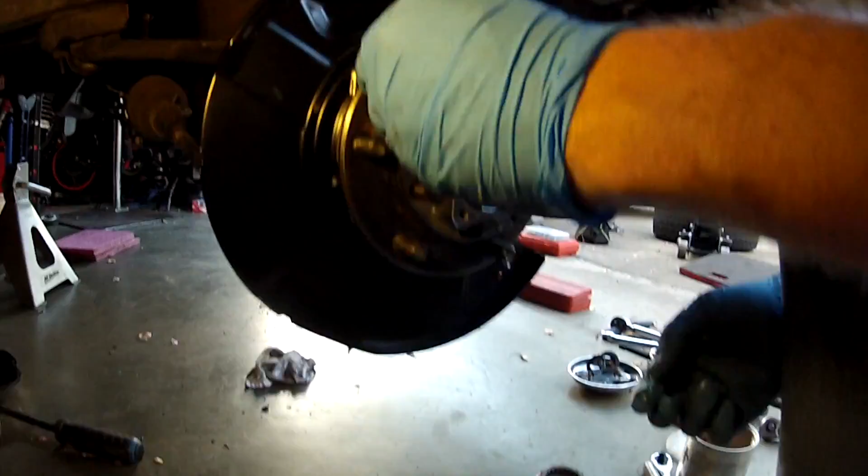Okay, it's on. Now we're going to install these with the cone washers, and the cone washers like to seize, so I like to just put a little bit of grease on the outside. So the cone washer looks like that. It's a split washer that's conical. Toyota uses these on a lot of things. They basically add strength to the joint design, and it also helps positively locate the parts.

So what I'll do is I'll show you one of them going. So we put the cone washer, the washer, and then the nut. In this case, I actually had some factory acorn nuts from a first gen 4Runner, so that's what I'm going to use because they look kind of cool. So we'll get them all installed like this, and then we'll torque them. So cone washer, flat washer, and then the nut.

Yep. Jordan is just going to tighten these up to feel. He's not too worried about the torque spec. He's just going to cinch them up tight. He's got a shorty little ratchet, a shorty little 3/8 drive. He's not tightening them like crazy. He's just snugging them up nice. The spec is about 18.

Now we're going to put the hub dial face on, and let me show you how this works. So you have a spinning part in the middle that's free and lock. When it's free, this hub dial is all the way retracted like this, and then when you turn it to lock, it slides up these cams and pushes down in. And so you can see what it does. You have little cogs here that mate with the body that's fixed to the hub, and then splines on the inside that hit that inner hub gear and connect the CV.

What you're seeing is until you lock that, the CVs aren't going to be turning, but as soon as you lock that hub, the CVs will now start turning, correct? Correct. Okay. Great. So we install these in the free position with the thing down. We've got a new gasket on it. New like star-shaped gasket. Exactly. The Toyota old-timers call that the star gasket. You don't have to pack these by any means with grease. They just slide a little bit, so just put a little light coating so everything is nice and free.

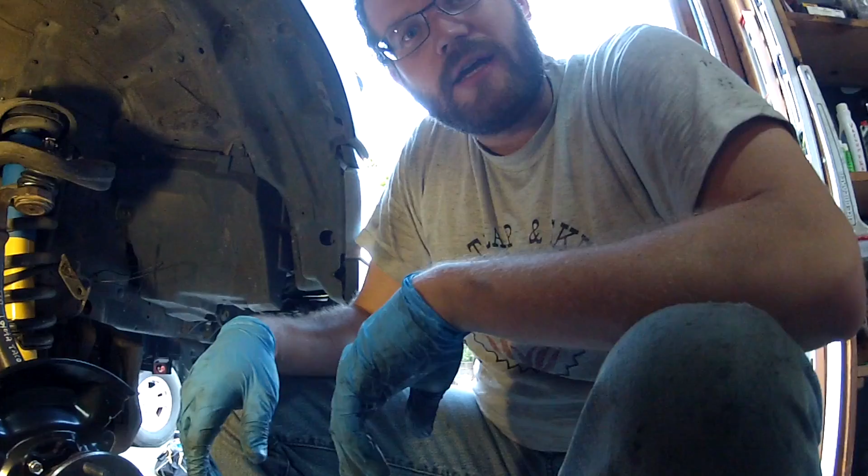Now what's cool about this, since this truck is equipped with A.D.D. as well, is you can drive around with your hubs unlocked, but then if you're riding trails one day or something, you can lock your hubs, and then every time you shift, it'll connect and disconnect in the front. So it's just kind of double disconnect, if you will. Gotcha. For whatever that's worth.

There we go. Great. Now that we got the hub on and we determined that it works fine, now we're going to get the brake rotor back on, we're going to get the caliper back on, and we should be done with this side. So Jordan's now going to put the rotor back on.

Boom. Now we're going to have to unhang the caliper from its purchase there with the baling wire. He can slide the caliper over the rotor.

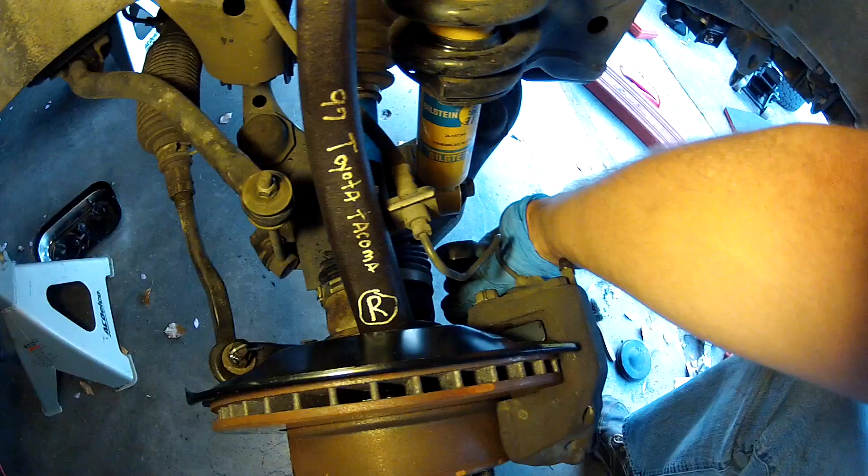He's going to get the bolts started, and then the torque spec for this is 90 foot-pounds. There's the top one, now he's doing the bottom one. There we go. Jordan is now going to get the 12mm bolt that holds the brake line to the knuckle back in. No torque spec for this, he's just going to get it nice and snug. Okay, that's good. So we're almost done with the job.

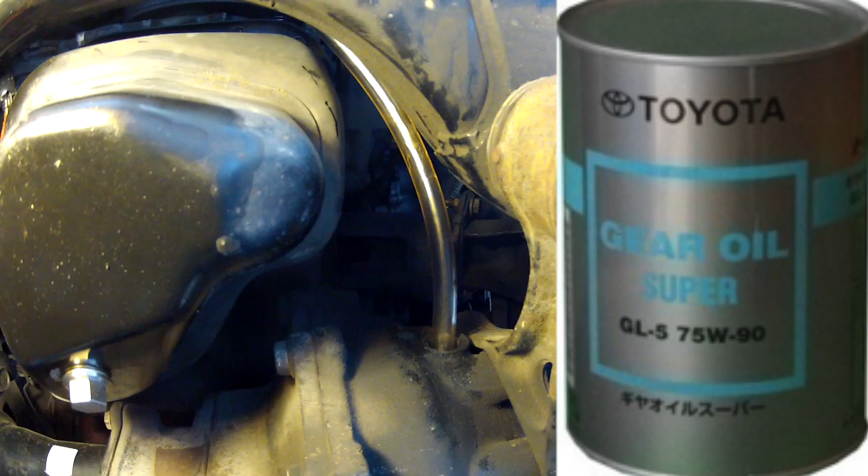Don't forget to fill your differential. If you drained it like we did, fill your differential with some fresh 75W-90 gear oil or whatever special synthetic gear oil you want to run in your differential. The factory service manual suggests 75W-90. And then when the fluid starts pouring out of the fill plug, then you know you're full. Then put the fill plug back in, torque it to spec, or just torque it till it's tight. So don't forget to fill your front differential.

Once you got your differential filled, get your skid plates back on, and then torque your wheel lug nuts to 85 foot-pounds. So here's a question.

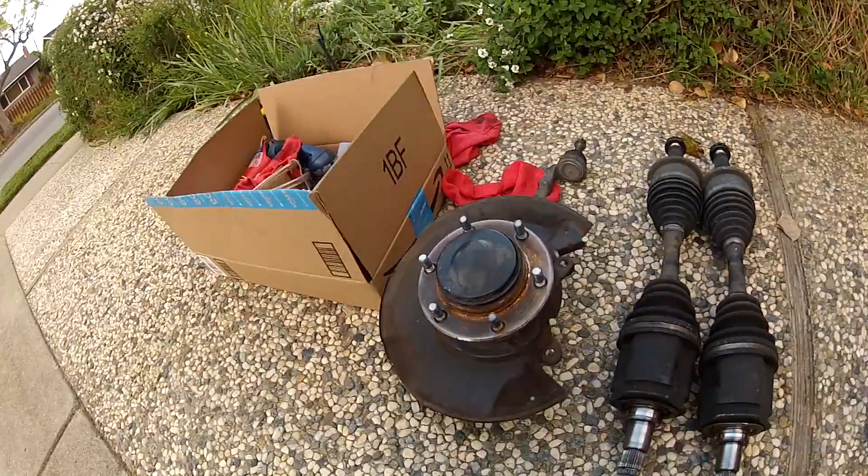What do you do with these old knuckles and hubs and CV axles that you have taken off of your rig? Well, I guess you could save them if you ever want to go back to the ADD system, the automatic differential disconnect, or you could sell them on eBay or Craigslist, or maybe you have a needy third-gen 4Runner friend that you want to help out and give him this stuff because maybe his bearings went bad and it's cheaper just to swap the knuckles than to deal with swapping the bearings if you don't have a press. So whatever you want to do, but you got extra parts now.

It was split between 2 days. What we showed you on the first day is the Tacoma manual locking hub knuckles that he bought on eBay. His knuckles came with brake dust shields that were in really bad shape, so the seller had actually taken them off. So some people might find knuckles with good dust shields and the bearings feel good, and you might say, okay, I'm not going to touch these bearings because they feel good and I don't have a press and I don't want to deal with all that press work.

But we were forced to press out the hub to get a new brake dust shield in position, and when you press out that hub spindle, 9 times out of 10 you're going to destroy the bearing like so. It's going to come out in pieces like it did on our first one. If you're lucky, it comes out clean, but the thing is that this has been on that spindle for a long time, and it gets kind of locked on there. So all that force to push that spindle out of the bearing is most likely going to destroy the bearing. So it's best to just buy new bearings, new seals, and do it the full way.